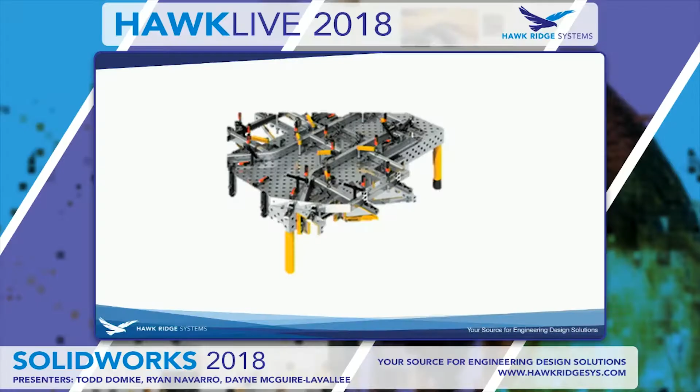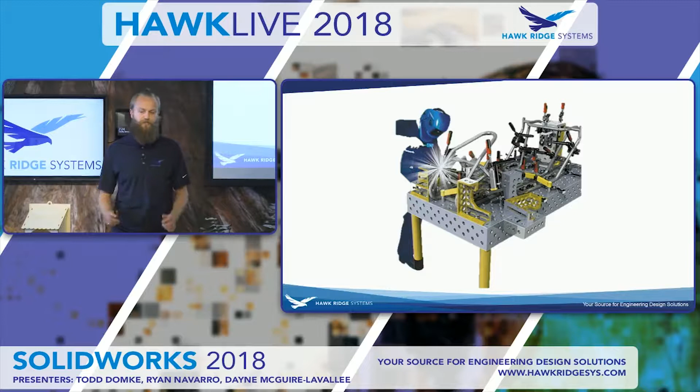So how many of you guys here work with weldment or sheet metal structures? Lots of us. So does this image look familiar? How about this one? So how painful is it to measure and align all those components before you start doing all your fixturing and your welding? Is that a costly part of your assembly and setup structure?

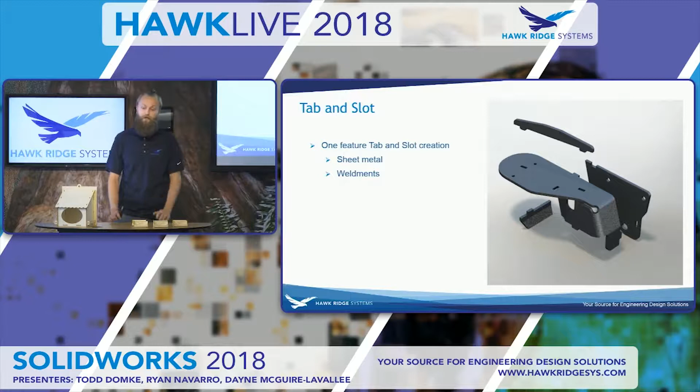Well, it doesn't have to be, because the tab and slot fixturing method is a good solution to that problem. It used to be really time-consuming and tedious inside of SolidWorks to set up a tab and slot, but now in 2018, you can do it with one feature. That works with your assemblies, your parts, and even your multi-body parts.

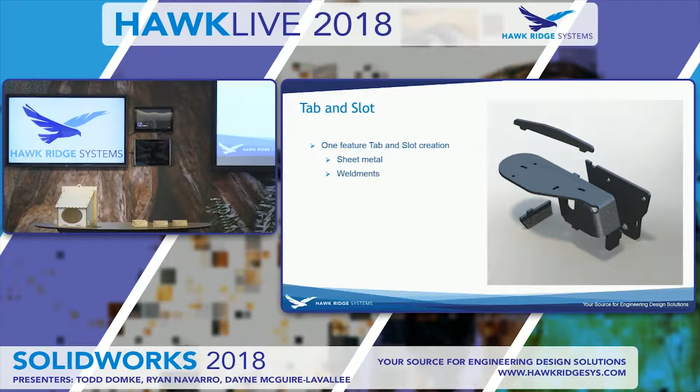So let's jump into the software here and see exactly what that looks like. So I have myself this airbag upper support here, and we can see it's a multi-body sheet metal part, and it's using tab and slot to try and align everything here.

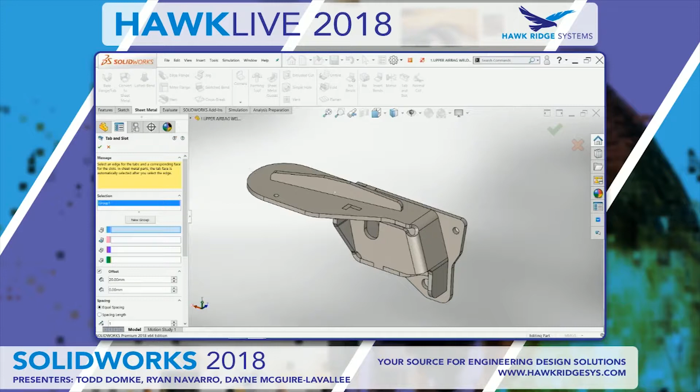So in my sheet metal tabs now, I have this tab and slot command, and it is really quite easy to use. So the first thing I need to do is grab an edge, and that's where my tab's gonna go, and then a back face on where to terminate my slot. And you can see it's starting to give you a nice preview exactly where that slot's gonna lay out.

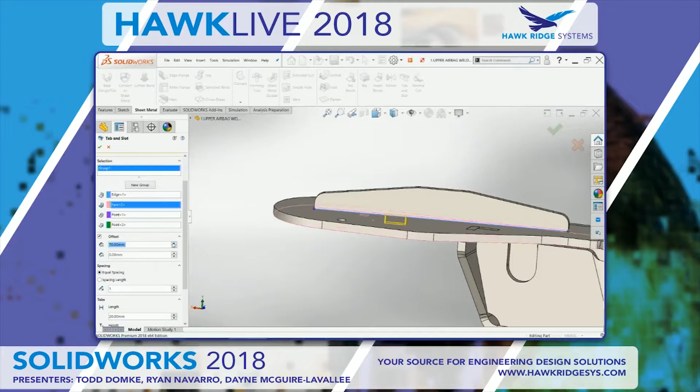So I have some offset points, my purple point and my green point at the end, and I can set an offset. So maybe I need to avoid features or another edge there or something, so I can get these tabs and slots exactly where I need them to be really easily, all inside this property manager here.

So I can set up equal spacing for them with X amount of instances, or I can get really custom with it and go in there and set up spacing for each one of those. I have control over the length of all of these tab and slots, as well as the height.

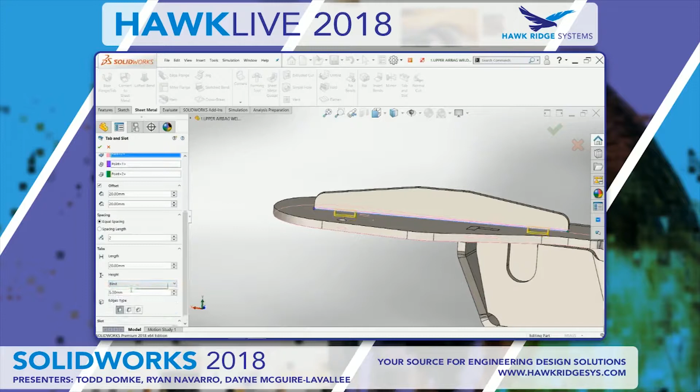So I can give it a blind end condition, or up to surface, or even offset it from the surface if I need it to protrude or anything like that. I have some corner treatments I can do to it, just to make sure that it has a nice easy fit in there. So I can put a fillet or a chamfer, and just like that, it will slide in.

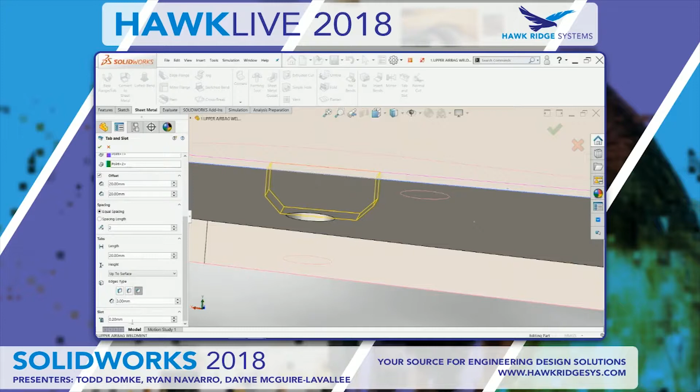And the last part of my property manager here is just the clearance value. So I can put in different clearances for a tighter or looser fit for my tab and slots.

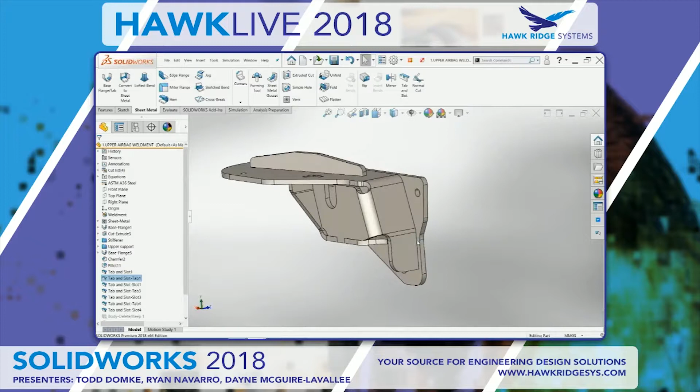So there is groupings as well. If you've set up all of your property manager and you want to have a bunch of different edges for your tabs and slots, you can just hit our new group option, just like you would in weldments, and grab yourself a new edge and a new face to generate your tab and slot nice and easily there.

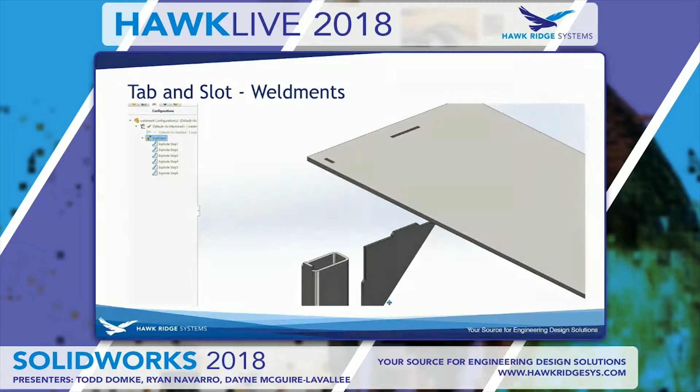So it works for weldment structures as well. You can see here that the alignment of all these components is going to be really easy, because there's literally a hole for everything to fit into. It's only going to fit one way, and that one way will be the right way. So when you're done welding everything together, you don't look at it and think, oh man, that piece was backwards.

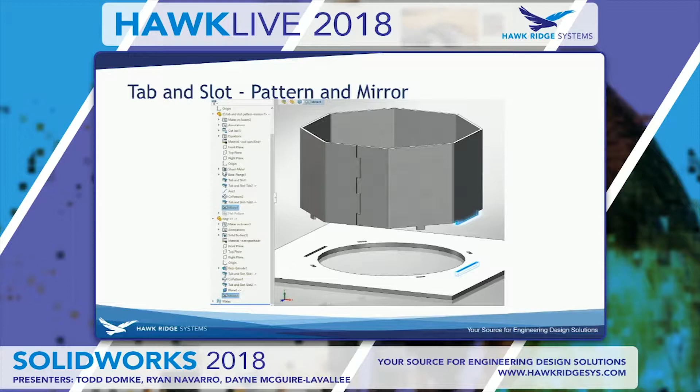It works with all of your patterning and mirroring tools as well, just like you'd expect any SolidWorks feature to do. So we can see I started with this tab and slot here. I used a circular pattern to pattern it around. And then on the left side there, another tab and slot, and then just mirrored that around. So it is a very functional tool right out of the gate.

So Ryan here was working with these tab and slots, and he made these cool little business card holders. And they worked really good. They're balsa wood that he got laser cut. So then I was a little offended because it was my section, so I had to make something way bigger. So I made myself this big old birdhouse here. And I wasn't sure about how well those clearances were going to work.

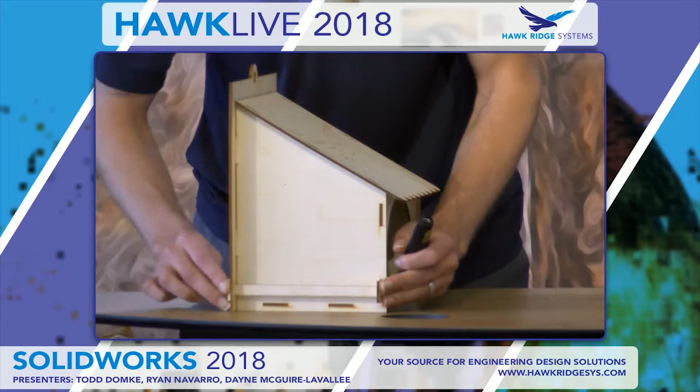So I used about a 2 thou clearance, and you can see that I can slide these components in and out really easily and line them up just like that. This thing fits together really snug, and just like Ryan did here, you can start gluing those very easily, just like that.

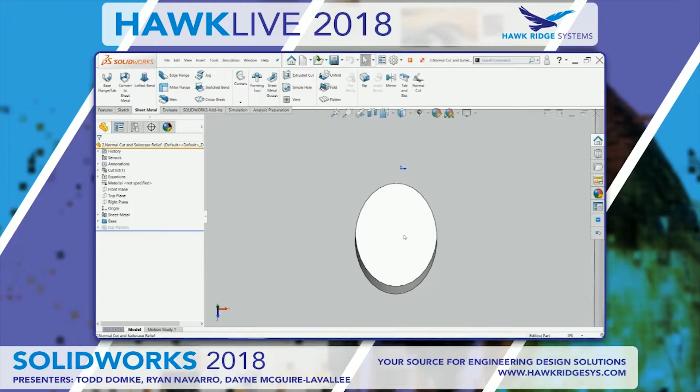Some additional sheet metal features that have been added are a normal cut feature and a suitcase 3-bend corner relief. So I have this hole up here in this piece of sheet metal, and it's not a normal cut. Maybe it was done as an assembly feature, or using the indent tool, something where I didn't have that nice normal cut checkbox like you do with the extruded cut inside a sheet metal tool. Now I just have this one-click normal cut button where I can grab this angled face here, and just like that it will generate that face normal, so I can use a cutting tool really easily to make that.

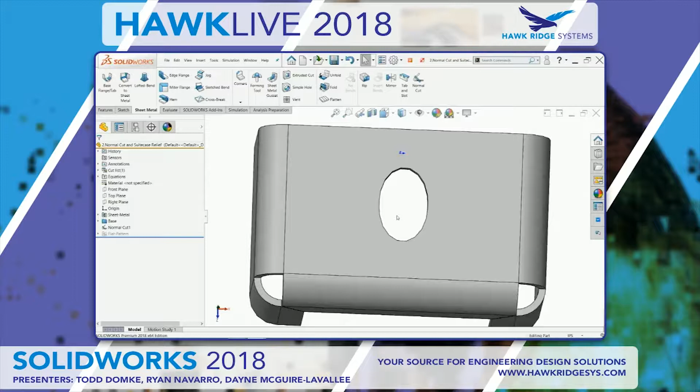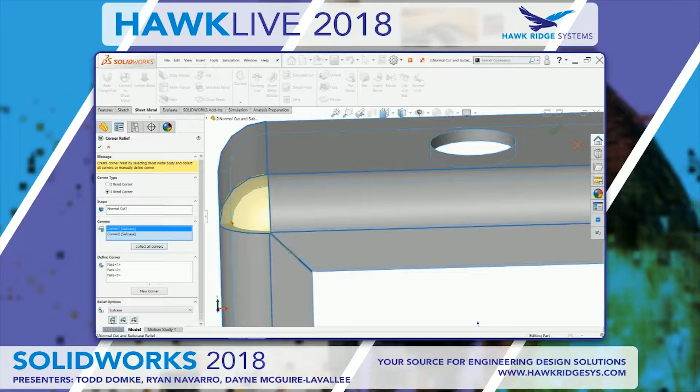It also gives me a feature here in my FeatureManager design tree. So we have a new 3-bend corner relief, and that's the suitcase corner. It comes with a couple options where you can define how much of the gap you'd like to fill. For each one of those corners, I'm going to do something a little different here. We can see we can have some of that gap filled, none of the gap filled, but it fills that corner really nicely for us.

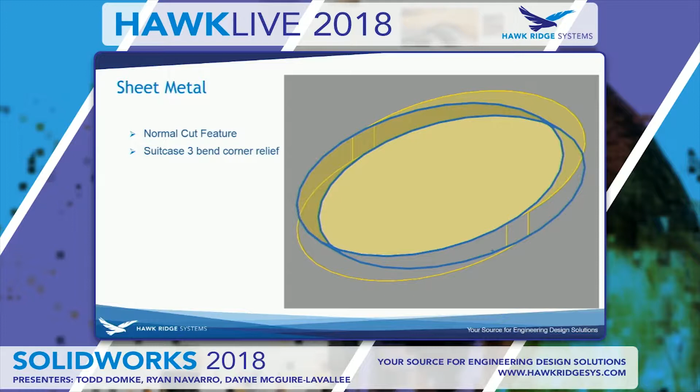So in summary, the normal cut tool can normalize those sidewalls in your sheet metal models. The normal cut tool applies a normal cut feature, and that's independent from the tool that was used to remove the material initially. The suitcase corner relief creates a closed spherical corner without any cutouts. The sphere is based on the existing sheet metal parameters.

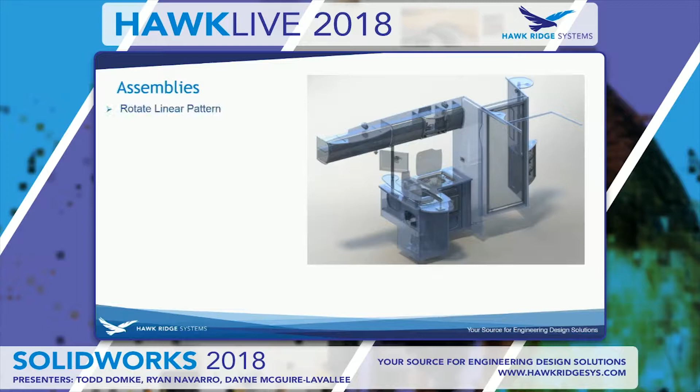So assemblies have had some nice updates aside from those performance evaluators that Todd was talking about. The linear pattern tool now has the ability to rotate instances. There's been some mating enhancements where you can temporarily hide faces with the Alt button and the new misaligned concentric mates, as well as the ability to automatically update our SpeedPaks when we're saving assemblies.

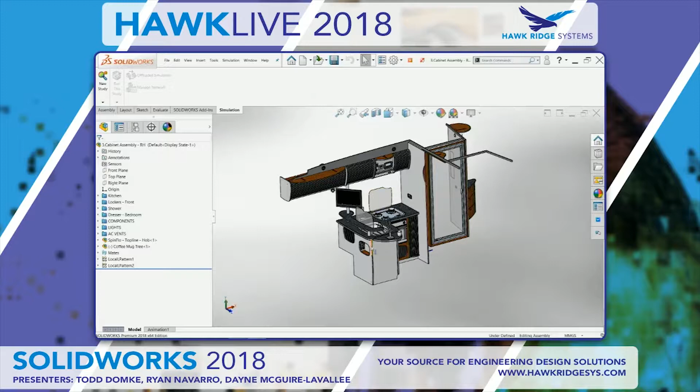So I'm back in my kitchen assembly here, and in this motorhome we can sleep about 6 people, but my coffee mug stand here only has enough room for 1 mug, and that's not going to fly. I'm going to have some grumpy people in the morning, so I've got to redesign this.

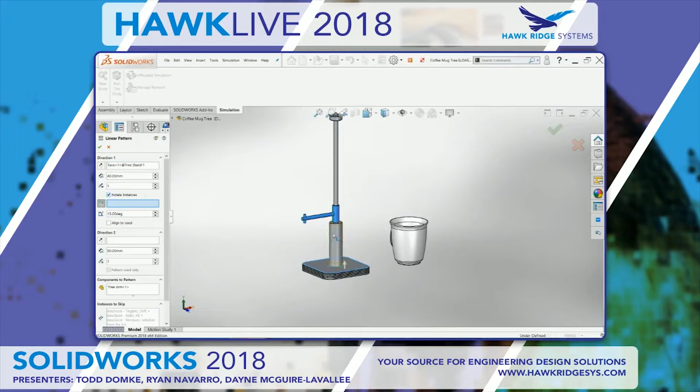So my linear pattern tool has this new checkbox where I can rotate instances. As you can see, as I add more instances, they start getting rotated around automatically. I don't have to put any angle mates in there, and I can set the angle to be exactly what I need it to be. Now I have enough space for coffee for everyone in my nice little tiny house that I'm going to be living in.

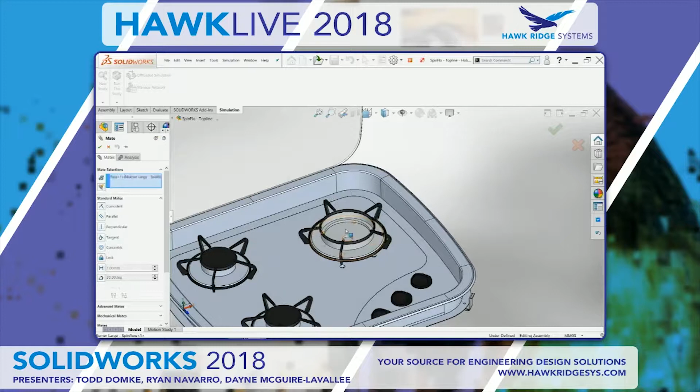So my burner here isn't quite mated properly, so I'm going to show you the enhancements to that mate tool. I'm inside my mate tool and I'm hovering over a face, and now if I hit the Alt button, I can temporarily hide that face. Before I'd have to right click and maybe select other or select through geometry, but now that's been hotkeyed down to the Alt button.

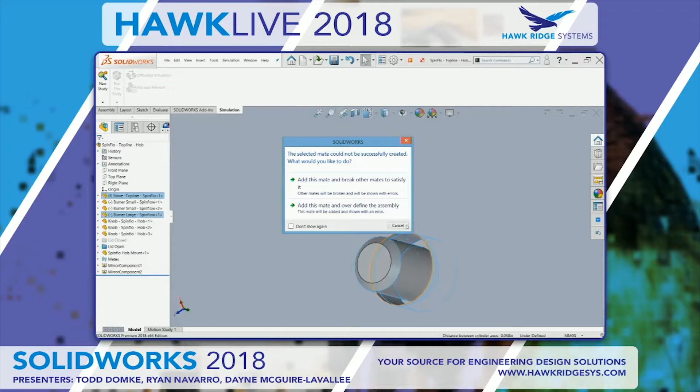So I have my bolt pattern and my hole pattern, and they're not quite perfectly lined up here. I'm going to make myself one concentric mate and see what I have going on. Looking at this second hole, I can see I can't quite get that perfectly concentric. So what I have new is the ability to set up some misaligned concentric mates.

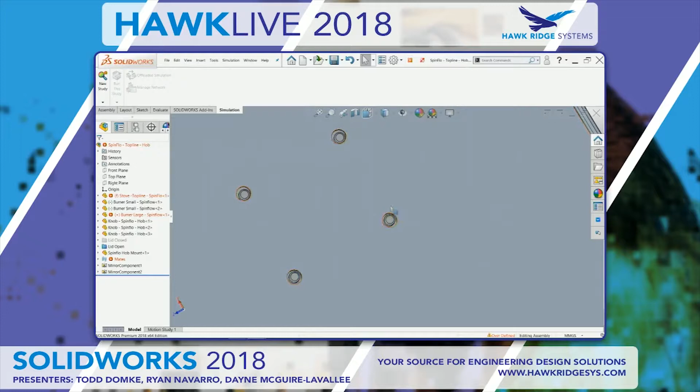So I'm going to come in here and grab that. I think I turned it off in my settings here. So if you don't want to create those misaligned mates, you have this nice option here to allow the creation of misaligned mates, which I had turned off. Let me come back in here and show you exactly how that works. So I have my first concentric mate, and now I'm going to try and make this second one lined up here. Cool.

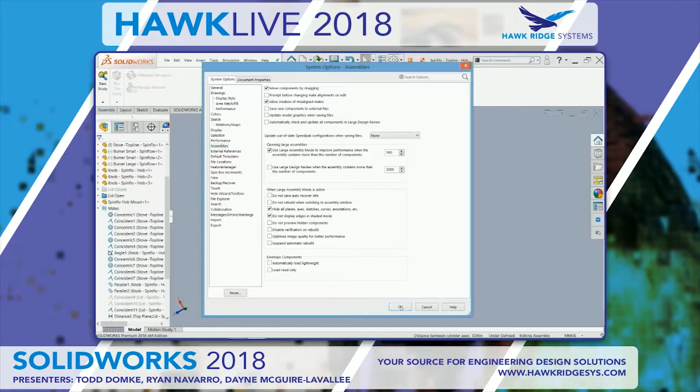Allow creation of those mates. Now I can grab my misaligned mate and throw it in symmetrically, just like my width mate there, and it'll split the distance of all those off-centers, allowing me to line that up.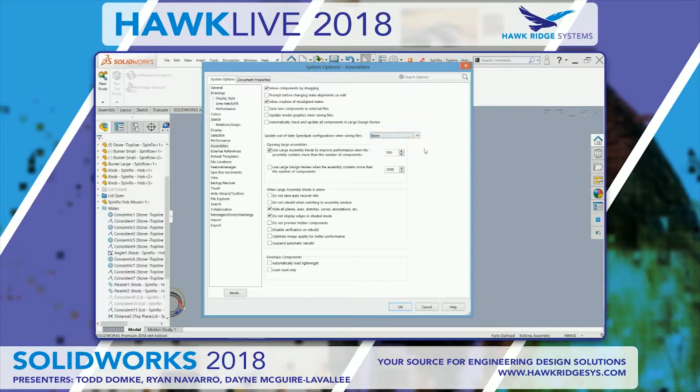I didn't want to get lazy when I was designing, so I had that turned off. You have that nice little option, and this is also where you can set up your updating SpeedPak options when saving your assemblies. By default you can leave it at none, set it to update every time you save, or flag certain SpeedPaks to update while saving, saving you from having to go in and update them manually when you need to recheck your graphics.

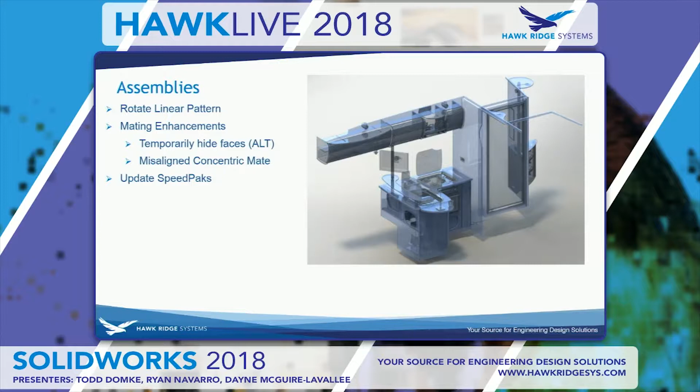So as a nice little summary here: the rotate ability inside the linear pattern tool, you can temporarily hide faces, do your misaligned concentric mates, and automatically update those SpeedPaks.

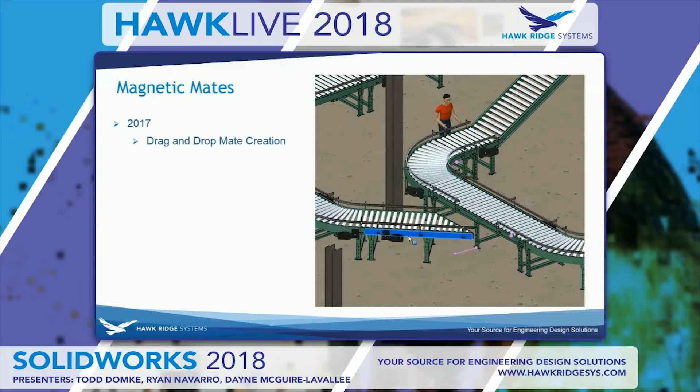The magnetic mate tool is a drag and drop method of moving your assemblies around. It was brought into SOLIDWORKS in 2017, and it's a great way to position components in maybe a facility layout scenario. In 2018 the tool's been enhanced even more, making it easier and more intuitive. You can cycle through connection points on your keyboard, have multiple ground planes, and get easier access to locking and unlocking those magnetic mates.

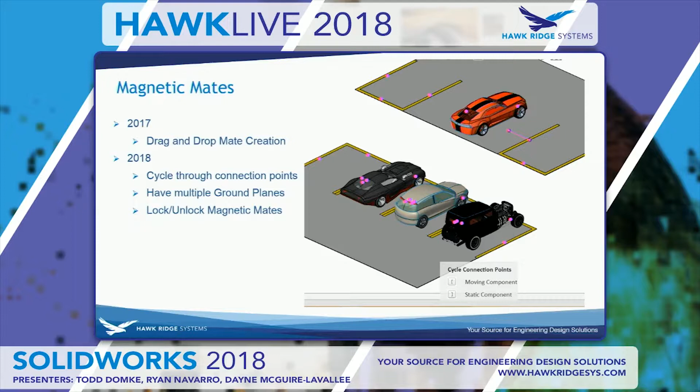I'm going to show you how this tool works by parking my red Camaro in one of these parking stalls. My stalls are set up as an asset with mating locations, and all my vehicles are set up as an asset too. As I drag this around, you can see all these orbs looking for something to mate to. If I hit my closed square bracket, I can toggle my mating locations on the part I'm dragging, and that will rotate it on the component I'm mating to. So I can move them around and grab exactly where I want to go. That's how I park my car every time, with a nice little drift like that.

So when I move these around and mate them into place, let's park in reverse here, right by my mouse, I have the ability to lock mates. I can lock that mate now and no longer be able to drag that asset around. Previously you'd have to go into your mates tool to lock and unlock your mates, but now SOLIDWORKS has made enhancements and it's right in front of you in your graphics area.

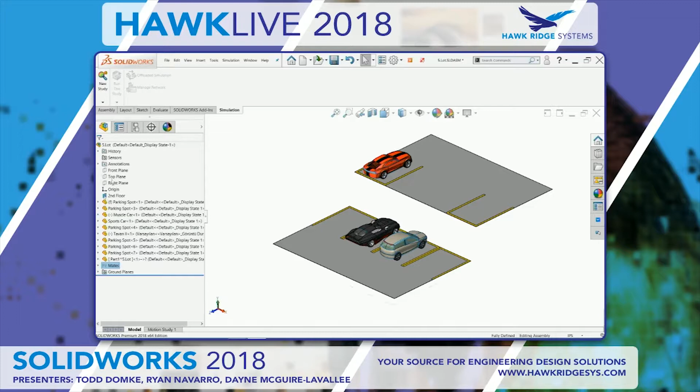We also have the ability for multiple ground planes, so we can go to our second floor or first floor with that model here. The magnetic mate tool is that drag and drop method of mating your components that share a common ground plane, and it's a new tool that keeps getting enhanced every year.

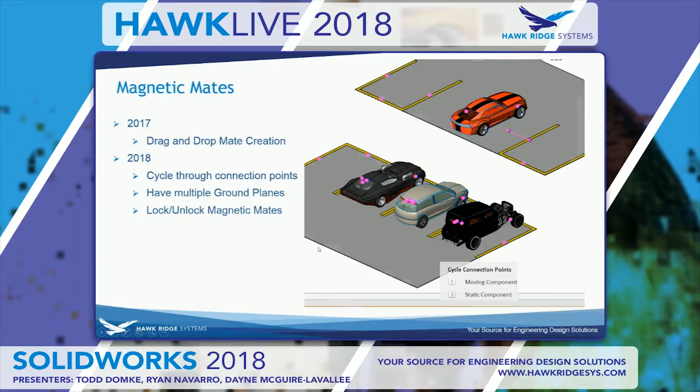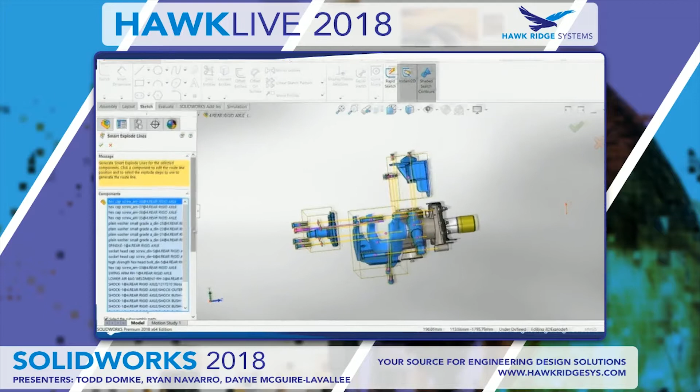Finally, exploded lines can be added automatically to exploded views. Let's check out what that looks like. I have my exploded view here, and this new feature called Smart Explode Lines. I can click on that, and a line has been added for every explosion step I have. By default it goes to the bounding box center of each component, but I can change that around and customize it.

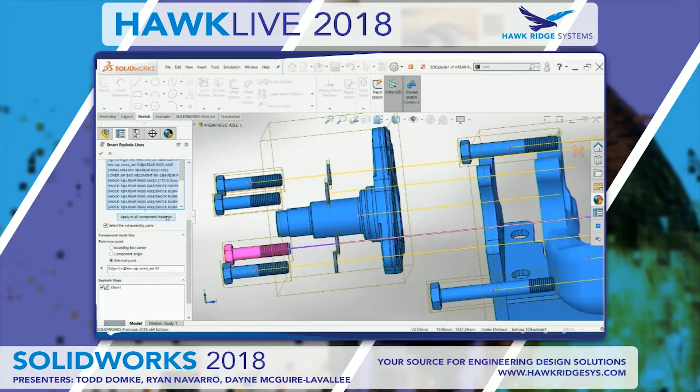I can drag this point and center it. For these bolts here, I don't want the line going halfway through the bolt, I want it right to the edge. But since I have a lot of bolts, I can apply that change to all of those component instances, saving me a lot of rework.

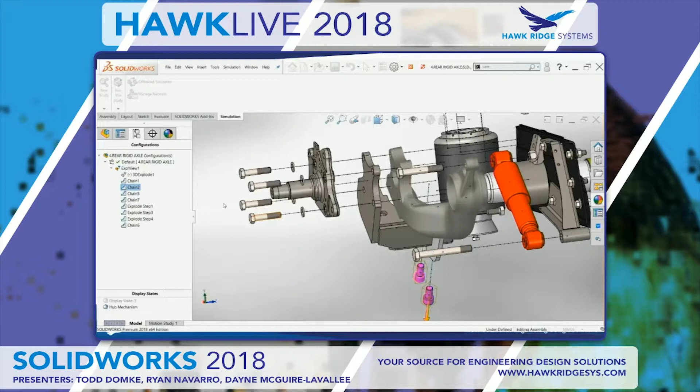So these are smart lines, as the feature entails. Any changes I make to those exploded steps are going to update automatically, making it really nice and easy to use. So this new tool will make technical documents you create in Composer that much easier, but I'll let Ryan show you that a little bit later.

SOLIDWORKS 2017 introduced flexible new workflows when working with third-party design data like your Inventor files, your Solid Edge, or your CATIA files. 3D Interconnect streamlines collaboration with your customers and supply chain regardless of which CAD tool they're using.

3D Interconnect is much more than 3D translation. In fact, it virtually bypasses the entire translation process and allows you to work with CAD data in a variety of design tools. It's also intelligent and understands when third-party CAD data is changed within its native design environment by honoring face and edge IDs.

Some enhancements this year include the ability to work with neutral file formats like your STEP files and IGES files. You can also read reference planes and custom properties, and a whole bunch of additional information from your third-party files like assembly cut features, custom properties, material properties, and unconsumed sketches and curves.

So now that we can work effectively with neutral and third-party formats, there's new ways in SolidWorks to leverage that data, and Ryan's going to show you that right now.

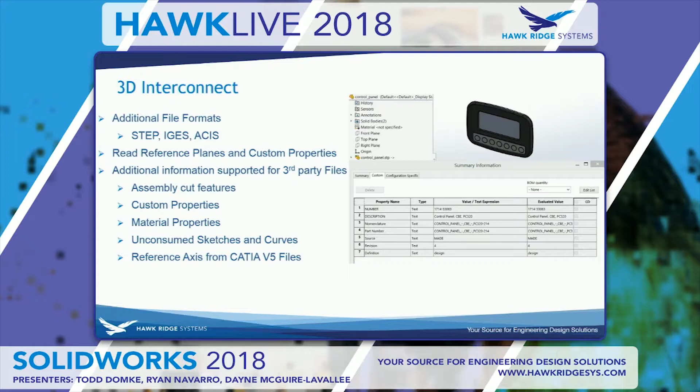Great, thanks, Dayne. So, yeah, I guess who here has ever touched an STL file or OBJ file? Okay, probably at least more than half the room here.

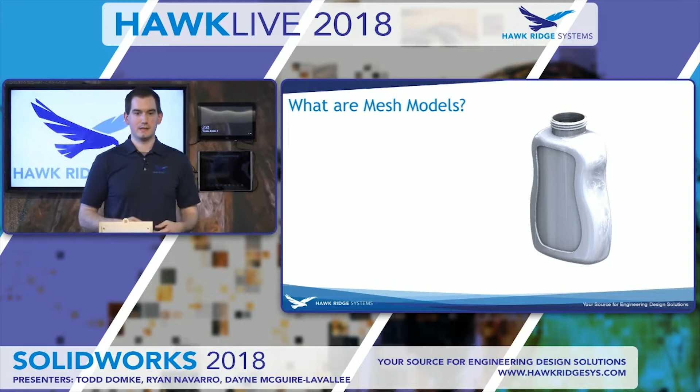For those of you that don't know, I want to talk a little bit about what mesh models are, why we should care about them, and then look at the new enhancements in the software for this year. So basically they're just a tessellated version of the geometry.

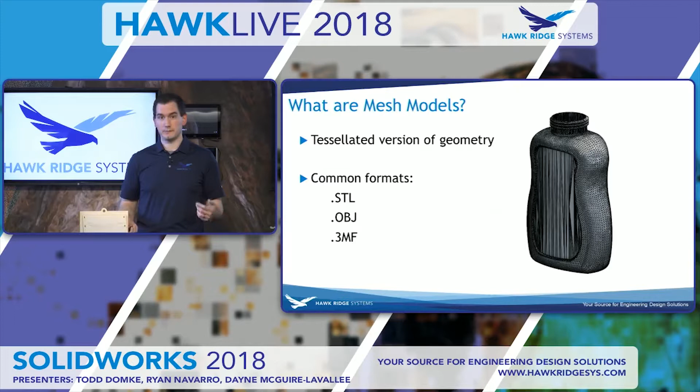Rather than working off true surfaces and solids in SolidWorks, we're getting a triangulated mesh made up of thousands or millions of triangles. The most common file formats out there are going to be your STL, OBJ, or newer ones like 3MF. So why should we care about them?

Well, high technology basically. If you're doing any 3D scanning, like you see here with one of our Artec 3D scanners that we carry, trying to replicate objects or reverse engineer, those are going to be spitting out some type of mesh file format as an output.

And then if you're doing any 3D printing or rapid prototyping, you're also going to be expecting, in this case as an input, an STL or OBJ file or the new 3MF files, like our HP 3D printer you see here. And it's getting to the point that these processes are so popular that there's even file sharing sites sprouting up just dedicated to mesh files, like Thingiverse, a common one.

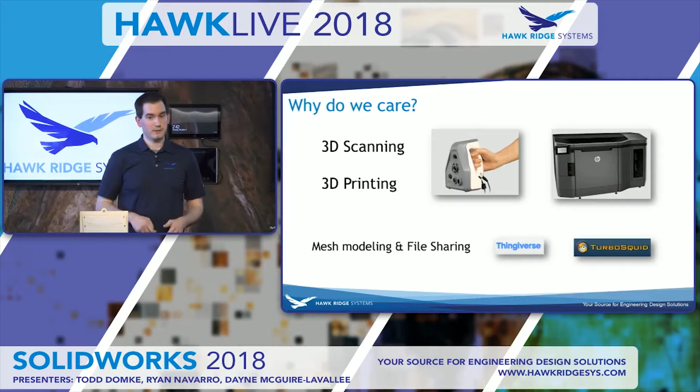There's also mesh-based modeling software out there that previously we couldn't really collaborate with SolidWorks. So these are some of the reasons why we should care about mesh files. Basically, they're becoming more and more popular in many industries. And we'll look at some of the enhancements in SolidWorks 2018 for dealing with them.

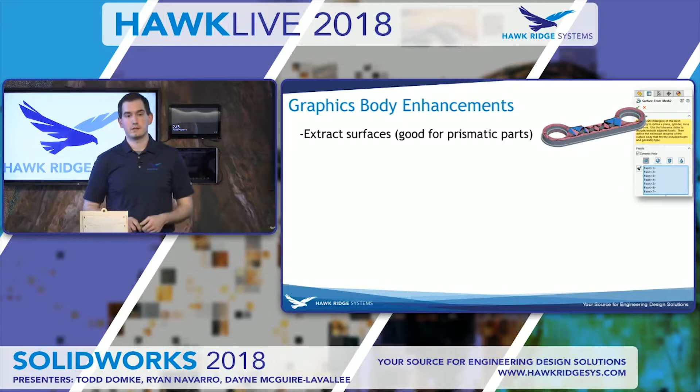This is first kind of some quality of life enhancements, I call them, where it's just easier to work with imported STLs. We can do some limited surface extraction directly from them. We can reference the mesh data directly now in SolidWorks Standard, and just many other little enhancements we'll take a look at inside the software here.

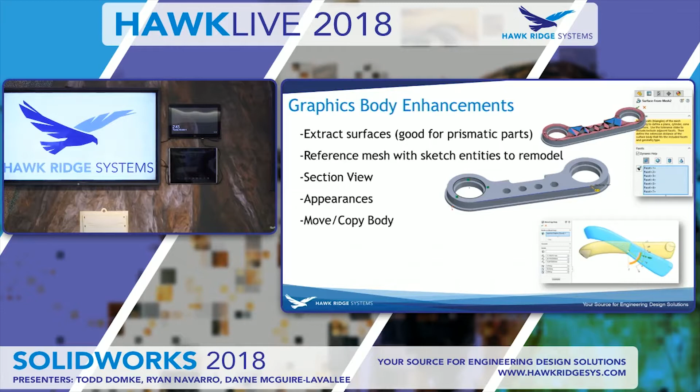So I'm just going to open up an STL file to get started. And they are unitless, so you have to remember to open them in the right units. That's one thing to be aware of.

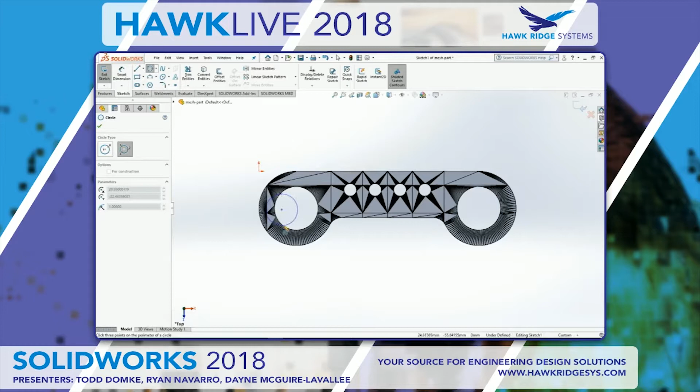And right away, if I switch to a shaded with edges view, you'll see that I can see all that tessellation there, all that data. And really, I think the thing you'll notice right away is if you go to any kind of a sketch in SolidWorks 2018, you're going to be able to hook on and directly reference that mesh data. So all of a sudden now, if you need to be able to take exact measurements from an STL file, or you want to start manually remodeling it, you'll have that capability to just reference the mesh as you go.

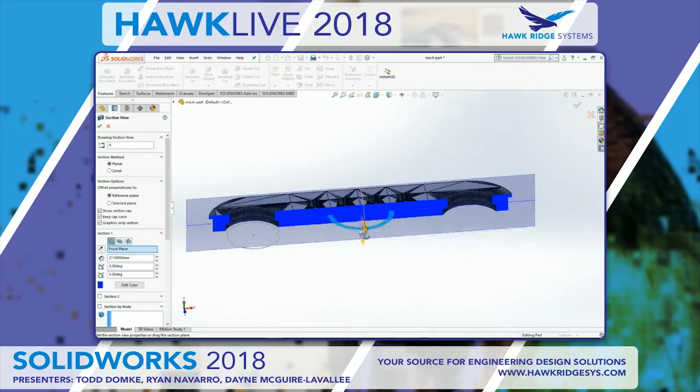There's other little nice things, like we can do section views. As long as you have the graphics only section option enabled, you can section a mesh file just like if it's a solid. There's other things too, like appearances can be applied to them as well.

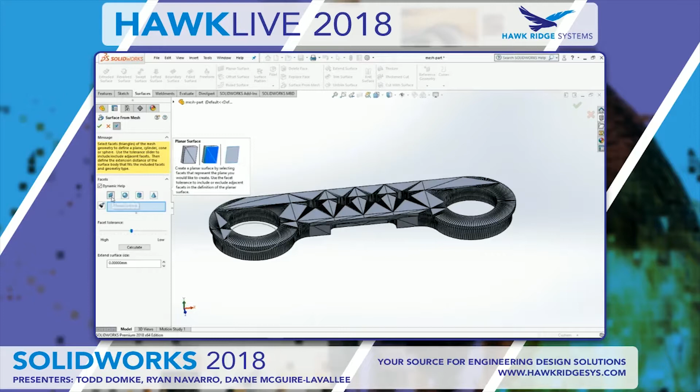If you want to extract a surface, under our surfaces toolbar there's a function called surface from mesh that you can add to your command manager. This allows me to do surface extraction. It's really geared for prismatic parts, so I can only do planar surfaces, cylindrical surfaces, spheres and cones. But it works quite nicely, so I can just select a few elements here from the top and tell it to extract a planar surface.

When I click calculate, it's going to look at that graphics body and try to extract out a surface for me. So that could be useful as a mating reference or as some other type of reference in an assembly potentially.

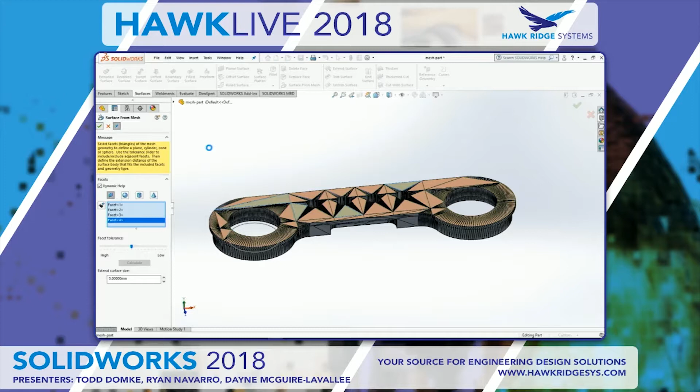If I try to extract a cylindrical surface, I can use this little paintbrush tool here, which is a handy way to select multiple facets. Notice I don't need to select a continuous row all the way around—I can just select a portion, and there's a tolerance slider there. If I click calculate, it will extract out that surface.

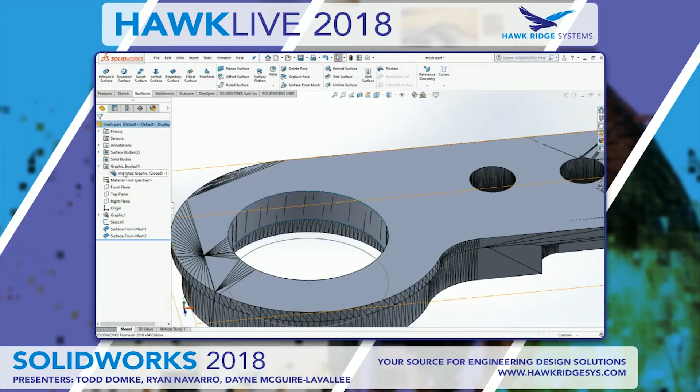You'll really be able to see what I did here. If I hide the graphics body now, you'll be able to see those native surfaces that we've extracted from there.

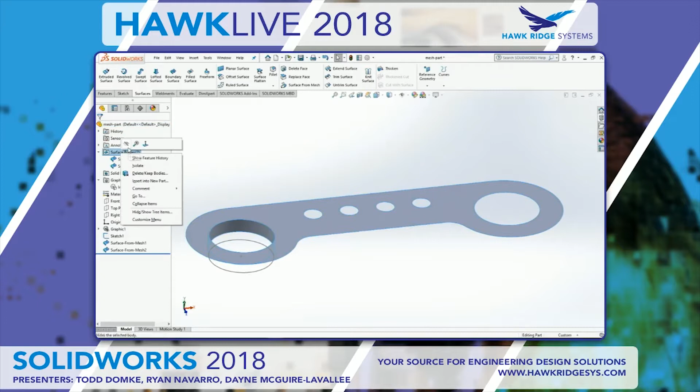So these are what I'd consider the more minor quality of life enhancements when working with these mesh files. The more major thing is for 2018, there's a whole new type of body called a mesh body. This enables us to do direct mesh editing, essentially. So if you need to bring in STL files, modify them, and export them back out as an STL file again, for instance to 3D print, this is a completely new workflow.

I'll show you the basics of it here. Suppose this is a file—I only have the STL file, and I like it, but I want to make a modification to send it out to 3D print. I'll just work on it as if it's a SolidWorks model. Maybe I want to fill in this little area right here where there's a cutout. I can snap that directly to the mesh.

I'm going to do an extrude, but rather than merging it into the body, I'm just going to extrude a separate block. This kind of goes back to the old school modeling, back when we used a lot of Boolean commands, merge and subtract and things like that. Because basically, if I had a way to get this solid body to also be the same type of body as this graphics body, then I could merge the two together, right?

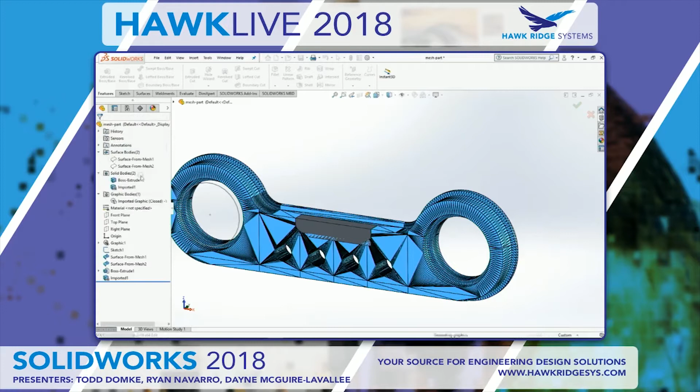It just so happens now if you right-click on any body, you'll have this new option: Convert to a Mesh Body. So the Mesh Body is a special body type within SolidWorks now. If we convert the graphics body to a mesh body, and also convert this solid body to a mesh body, all of a sudden I have new operations available to me.

I can combine both of those, and now I have a merged together single mesh body that can be exported back as STL. So that's a very, very simple example, but the power of this really comes in on more complicated geometry.

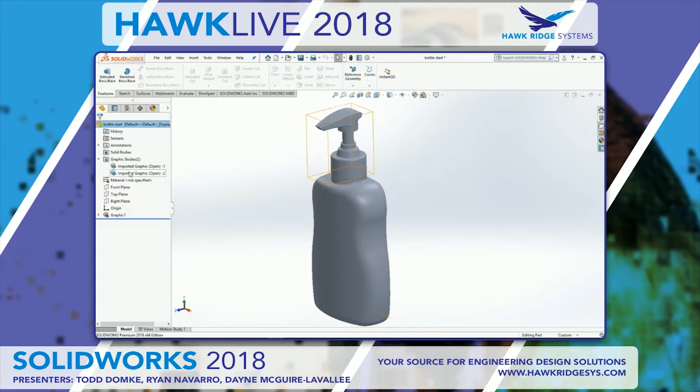I wanted to show a more organic part that could have come from a 3D scan. If we look at the wireframe on this, there's a lot more triangles. In the past, if we wanted to make any modification to this at all, we would have had to somehow turn it into a surface or solid, which is not an easy task. Now what we can do is, say I just look at the bottom half of this for now, I'll hide the top. Right now this thing has no wall thickness to it at all.

So maybe it was designed in mesh modeling software too, and that's great at making swoopy shapes, but it doesn't have Hole Wizard, doesn't have the other features to actually make something manufacturable. I might want to thicken this and send it off to a 3D print.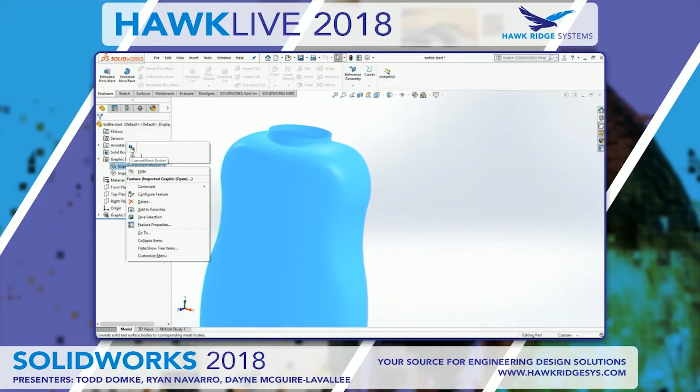So now we can convert that imported surface mesh to a mesh body, and we can actually use surfacing commands as well. We can thicken, we can shell, we can do a lot of different things here. So I can actually thicken this mesh body directly into something that I can go off and send to the 3D printer. Now it's actually got a wall thickness to it.

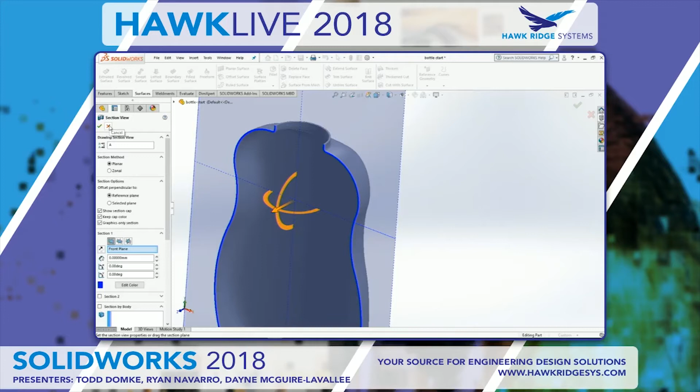So there's a lot of interesting possibilities here for anybody doing reverse engineering, 3D printing. I think you're going to find these enhancements really useful, and I'll walk through some of the potential applications for them here.

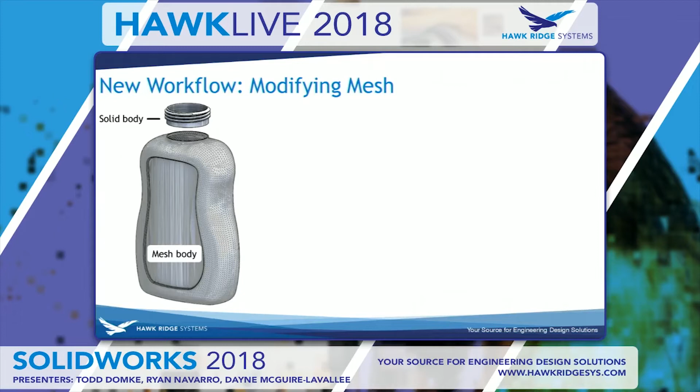So basically we can go beyond even those minor modifications we saw there. I could bring in features like threads, convert those to the mesh body, merge them in. And basically, if you want the full list of commands, this is basically it here. We can do combines, intersects, splits.

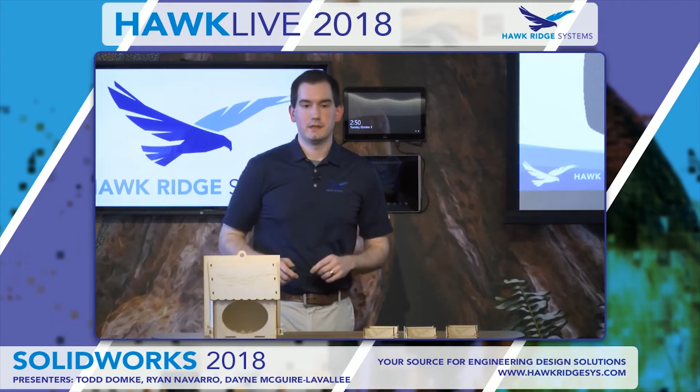Say I want to go from a 3D scan to a 3D print, right? This is what we used to always have to do in the past, which is import in the mesh file and then somehow convert it to surfaces or solids if we wanted to do anything with it at all. And it's really that step that was quite troublesome.

You were faced with really three choices. You could either manually remodel completely from scratch, or you could use an add-on like Scan to 3D, which comes in SolidWorks Professional. That would enable some automatic surface extraction. Or we have partner products like Geomagic that are really like the top end, if you want a more automated tool to just extract surfaces and solids.

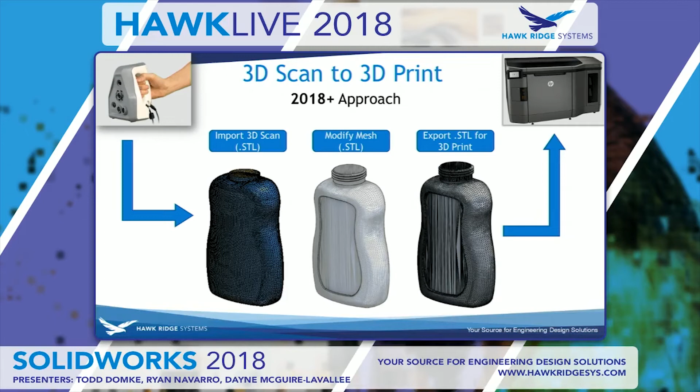So that's still what you'll want to do if you want to take a scan in and turn it into an IGES or a STEP or some other real surface format that's shareable. But if you're just trying to do this rapid iteration here, where you're just going from 3D scan to 3D print, or even other applications like quick turn machining applications, they do sometimes machine from an STL file.

It is possible. So if you're trying to do that workflow, you don't need to convert anymore. You can just bring it in and work on it and export it off as the native mesh file again. So we can bypass this step if you're intending to just go to 3D print. And that's what that process looks like.

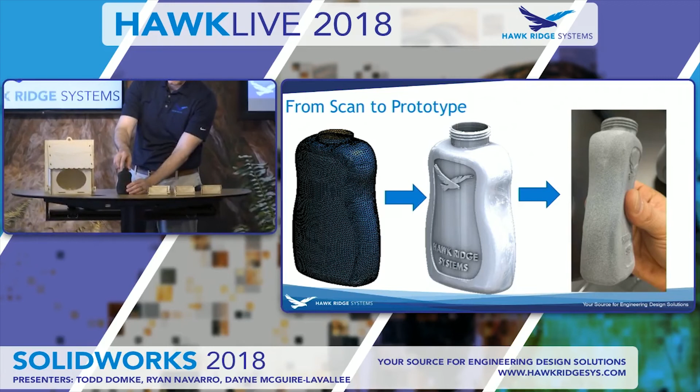So I happened to actually take that bottle. I was able to work from the scan, add manufacturing detail to it, if you can see it right here. And this was printed on the HP printer. It's actually got kind of a functional prototype to it. So we've even got the screw-on cap and everything there.

And with this material, we can actually squeeze that pretty well there. So again, taking in just an STL file, that otherwise would basically be unusable in terms of SolidWorks, and being able to add in manufacturing details and things to it and come up with some kind of a rapid prototype.

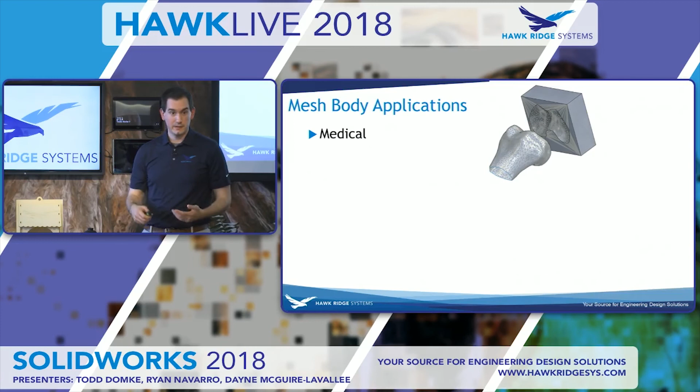So it is probably a pretty narrow use case. Ways I see this for our customers being used would be medical industry, where they're doing a lot of personalized patient care based on CT scans, customizing things to the patient. Any reverse engineering, quick turn manufacturing, where we need to really quickly make parts and it doesn't make sense to convert a real solid out of it. And just consumer products applications where you're scanning and iterating.

So that's just a lot of new technology that's embedded in SolidWorks. I'm sure they had to do some really interesting things behind the scenes to make that possible. So hopefully it'll be useful to anybody doing 3D printing, 3D scanning going forward.

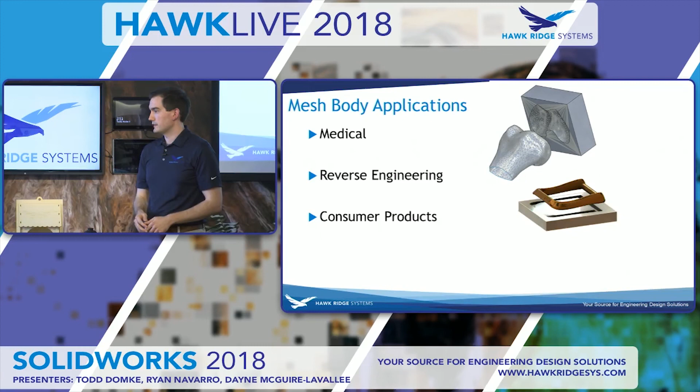Okay. And that really rounds out our detailed design phase here. So I think we're going to switch over to Dayne, and he's going to start talking to us about simulation.